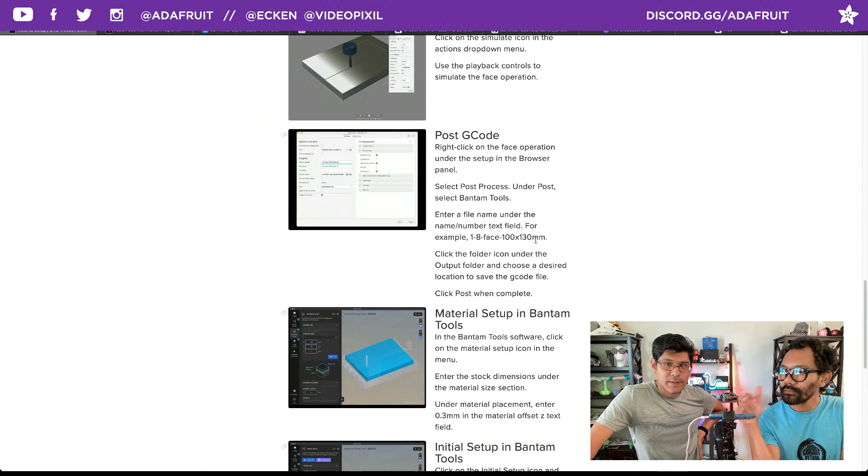And then posting the G-code, I walk through that. I got my own little naming convention where I name the file with the tool first, so 1-8, the operation, it's a face, and then the size of the stock, it's 100 by 130 millimeters. That's how I like to name my files. So we export the G-code, and then we import it into the Bantam Tools software. We set that up and just update our material setup. I walk through all of that stuff there. It's pretty straightforward though.

All right, and then in the next page, we're actually doing the facing of the stock. So, installing the tool, and then actually using the Nitto tape and applying it to the surface of your stock, aligning it to the spoil board, milling the file, removing it, flipping, and repeating, and all that stuff. So check those out. It's pretty specific here.

So after our stock is faced, surfaced to the desired thickness of our bricks, we're going to start off with the bottom of the brick. So I walk through setting up the tool paths for this. Of course, the G-code file is already available if you want to just do that, but I walk you through here, doing all the right settings and stuff.

So we're using a contour operation, a 2D contour. That just lets you do a simple 2D cutout. Our bricks don't have any really 3D bits to it. So it's just going to do a 2D path over and over again until it cuts out one brick. So we walk through that.

And then I'm using a 1/8 inch tool to do the contour just because I feel like you can do it faster. You don't want to use a small tool to do the full cutout because the smaller, thinner tools, they just aren't that long. So you have to kind of consider that.

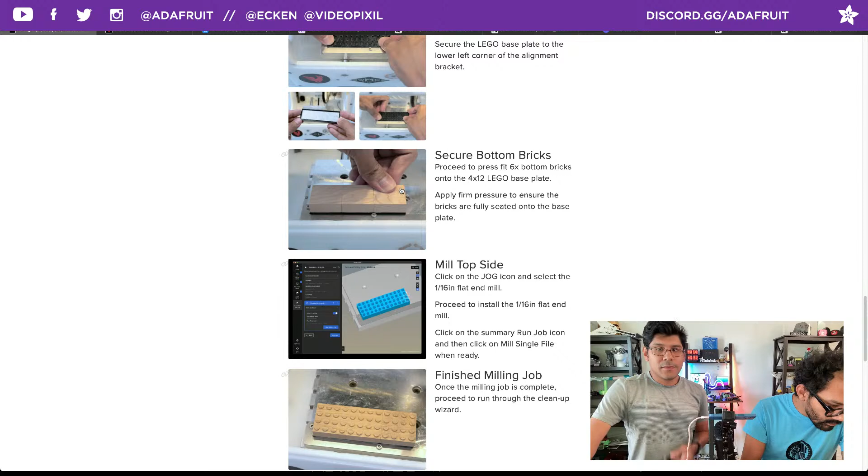And once you have that base plate installed with the alignment bracket, you can just press fit those blank bricks. Those bricks have the bottoms all cut out, so you can see the top there is nice and blank. So once that's all ready to go, we can start milling, and that's what it looks like at the end. For me, there wasn't any cleanup to do on the top side of the brick, which is really nice. And to remove them, you're just going to apply some pressure and pull them off. But they held in place really nicely, especially on the first go.

They have a really nice tight fit, and as you play with the bricks and start building stuff, the tolerances loosen up to the point where they're not as firm, but you want that firmness in the initial milling operation, because you want those bricks to stay in place. Test fitting works out really well. Once you get your first batch, you can start stacking them to see if they all fit in the right orientations, and then you can make a block by doing sets of 3. Since we cut 6 here, you can create a block just to verify that they all fit nicely.

And that's really the whole guide. Lots of fun, really great project for doing double-sided operations for milling. And I'm going to make some more bricks. I'm going to try to do some different sizes, maybe a Duplo as well. That'd be really cool to do, a Duplo brick. Yeah, we have so many spare pieces of wood that we don't want to throw away. We don't know what to do with them. They're too small to really put into a project unless you combine them all. Yeah, I'm going to make a bunch of these and maybe make some bigger ones.

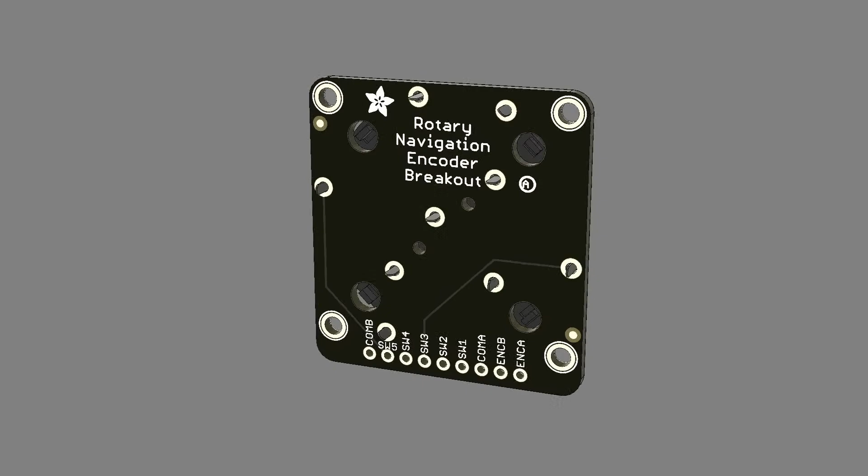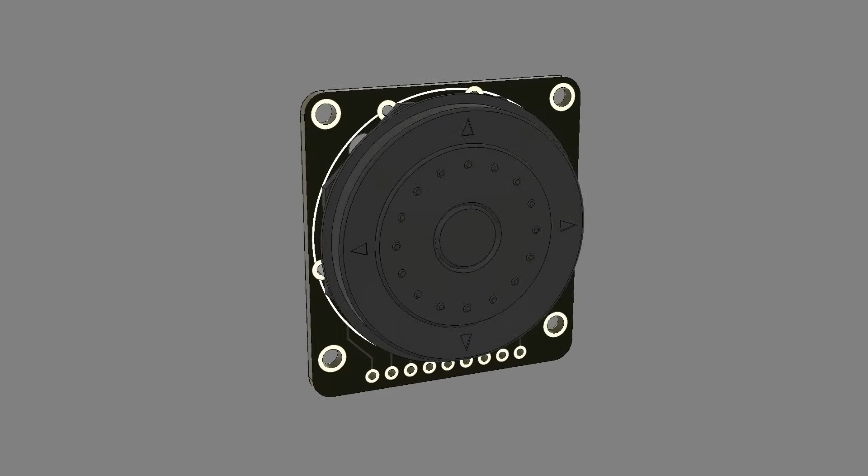Yeah, we also have another shop talk. Hold on, I forgot. Whoop. Definitely check out the CAD repo on GitHub. We have some new parts that I forgot to talk about the last 2 weeks. So this is the ANO rotary navigation encoder breakout. It has the plastic bit, the pins, and the PCB, and the silkscreen. So if you want to make a cool project and embed this into a neat project enclosure, you can use the 3D model to kind of get the mounting holes and stuff.

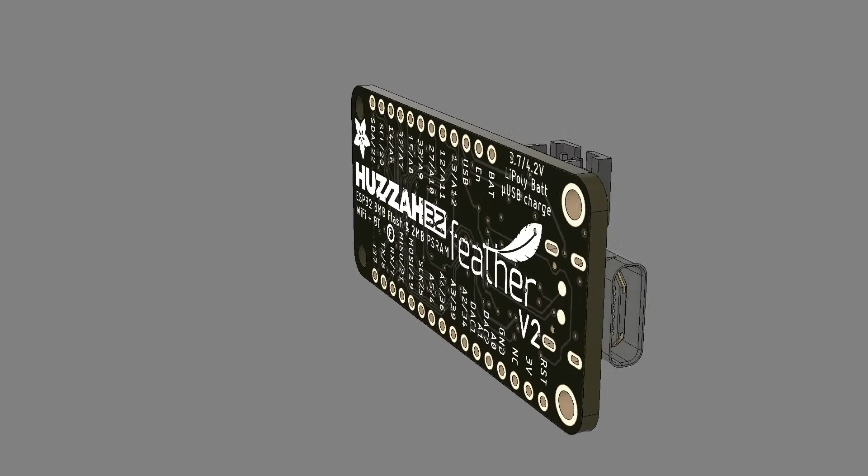But yeah, we also have another one. This is the Feather V2. I'll be working on the S3 and the other new boards throughout the weeks, but I just wanted to share that there are some new parts that you might want.

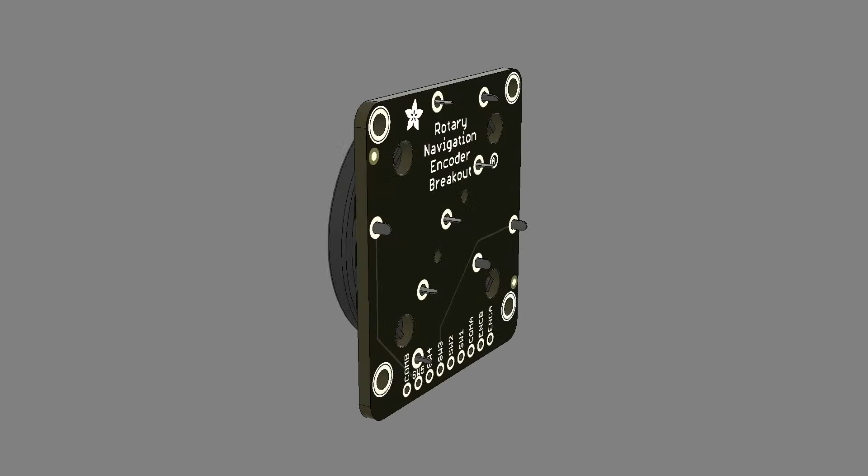And then to see the list of the new stuff, you can click on this over here where it says 180 commits. It's this thing here on the top right. You click on that. It'll give you a full breakdown of the parts that are added and the date. So you can see here, I added a bunch on May 19th. I added all these things here, and all of these were pretty much requests.

So just to let you know, if you add a request, give me a little time and I'll get to it. So things like the 6-DOF IMU and the 1.3-inch TFT bonnet, the RGB matrix bonnet for the Raspberry Pi, a 40mm speaker, the Perma-Proto Gizmo, the nunchuck adapter, the MCP23017 GPIO expander, etc.

So under the Issues tab, you can see here the parts requests. And it looks like we got some new ones here. The DIY USB HDMI parts. So I'll have to get those together. Cool. Yeah, that's a fun one. So that is this week's Shop Talk. Some new LEDs and some new CAD files.

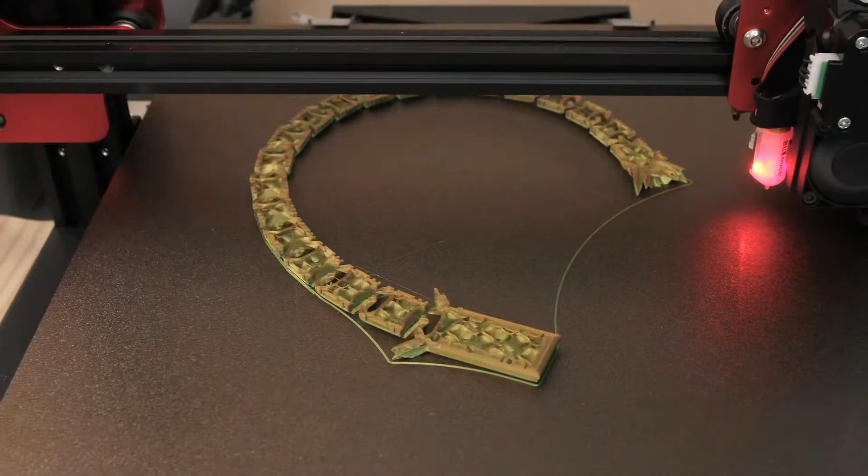And now we can take a look at Community Makes. All right, we got a couple of them. Last week's Community Makes was this super cool articulating Quetzalcoatl. This is the feathered serpent from the Mesoamerican culture. It's a bit of a snake with feathers. Sometimes they have wings. Super cool articulated design.

It's print in place, and we used some rainbow PLA filament. And the scales and the details, little kind of swirls, look really cool. Beautiful. Yeah. Pedro used some fishing string here to kind of demo it in the video. A lot of fun. It printed out really good. It's kind of ready to go when you print it, right? Like you didn't need any finishing or anything.

No, that's it. And here it is on camera, the silky rainbow, like the way that they do the changing on the filament spool, was perfect for this. So you have a little belly, you have most of the rainbow colors on his feathers there and on his tail. So it looks like it was kind of planned with the green being on the top of the scales. Yeah. I didn't plan any of that. It just was perfect in terms of what color was coming up next.

This is a free model. They're using the little chain-like geometry to have all of these linked together. And there's a couple of different sizes too, so you can print a smaller one or a bigger one, and different orientations as well. And the detail on this is fantastic. Yeah, check out all of the little scales they were able to get in there. Yeah, I like the kind of square swirls. Very Mesoamerican.

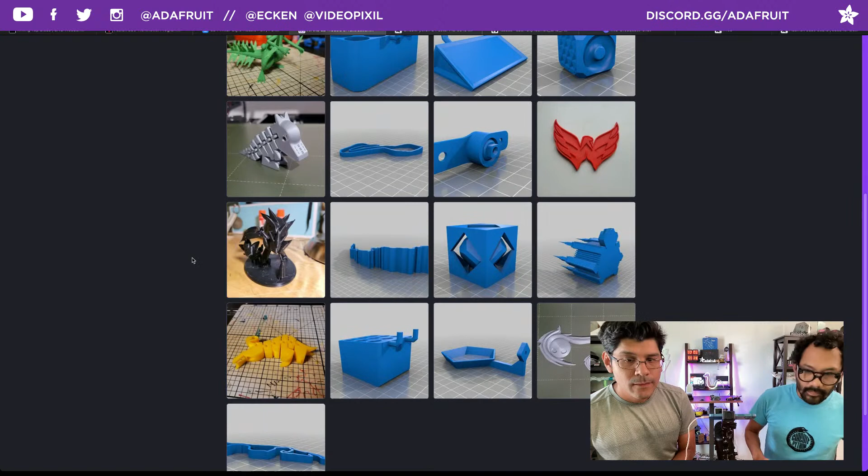Good stuff. Super cool. And yeah, check out Rextruction on Cults3D and check out some other designs. Okay, that was last week's. Super cool. Like you were saying, you could put the string on there, do a little puppeteering. I actually wanted to put little acrylic sticks on there to do his little head turn, but ran out of time. Sure.

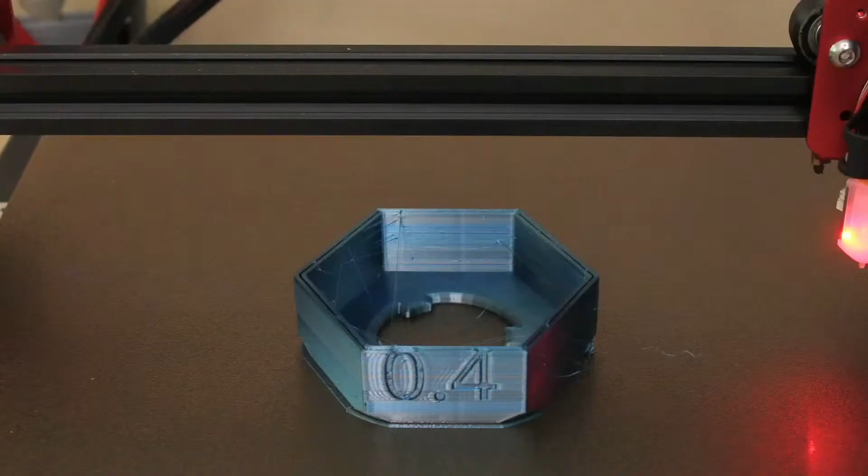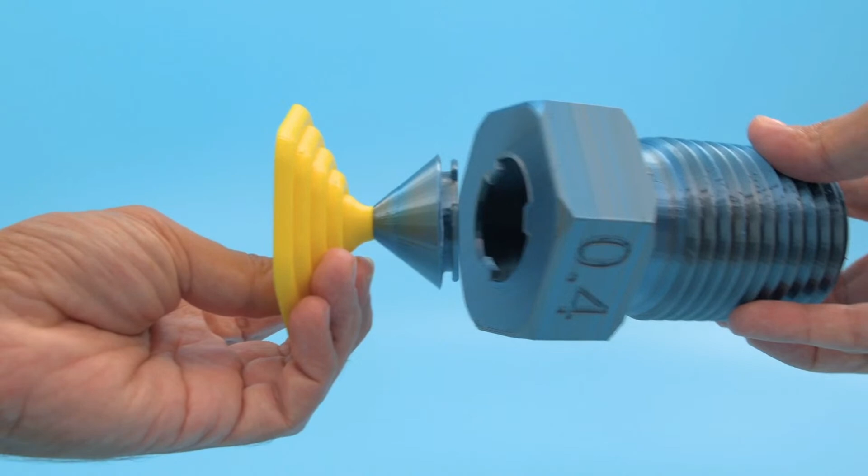And then from this week, I see a bunch of these nozzle models always getting posted, but I really like this one because it doubles as an actual pen tool holder with a secret compartment underneath. You can see where the nozzle gets attached, and then we're using this little base plate with some screws and a nut to keep it up. I like the way that illusion maintains, because at first I was like, how is that tiny little thing gonna hold something with substantial weight on top as a holder?

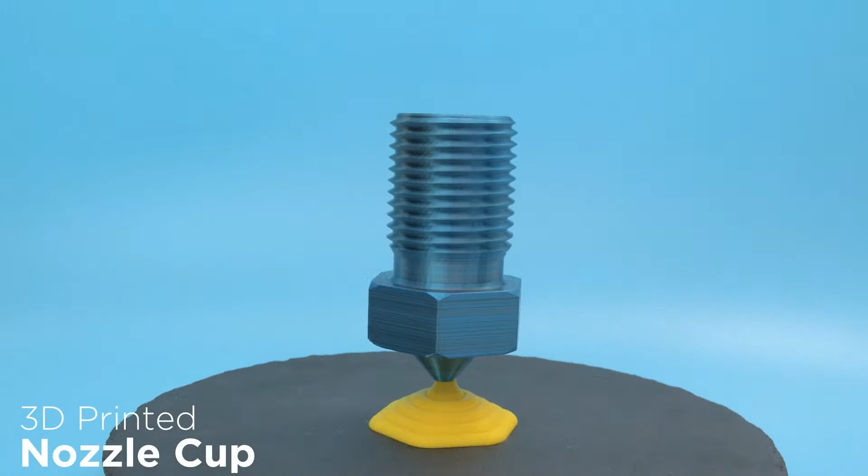And that's how. I think it was an M8 screw with an M8 nut, and that does a really good job holding it in place. I really like that it's a thing you see all the time, your nozzle for printing, turned into an actual holder. It could be a nozzle holder. Sure. A little storage for that. And here it is on the overhead. We're using this really nice gradient blue to silver.

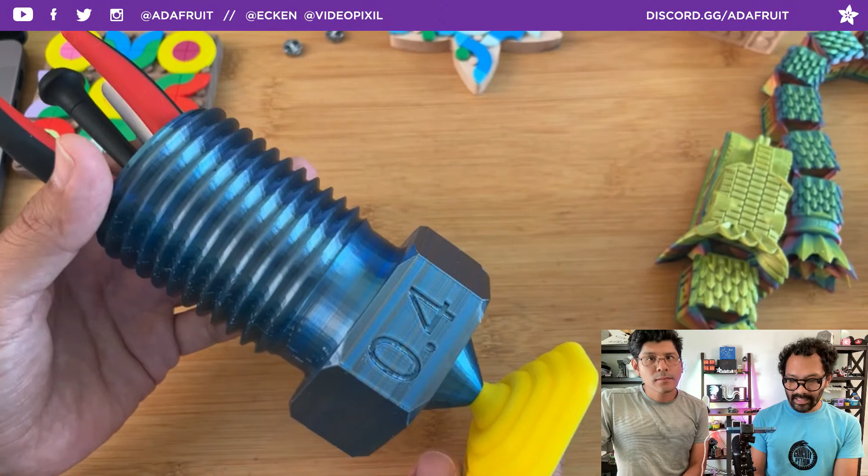Did have some sort of twisting action going on here, so you do have some banding, striations, from the color, but it's not too bad. Yeah, it looks good for the price, for this sort of stuff. I'll take that out there, and you can see where the screw goes in there with the nut. And I don't know if I'll be able to. Yep. Let's see. I'm gonna take this out here.

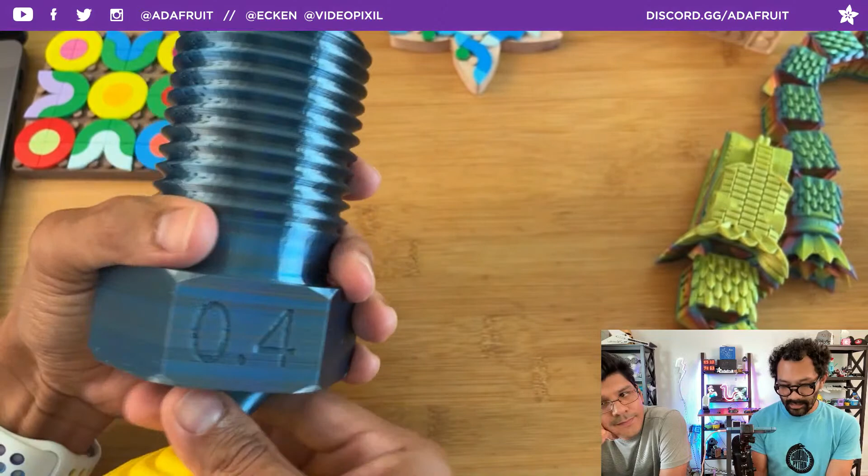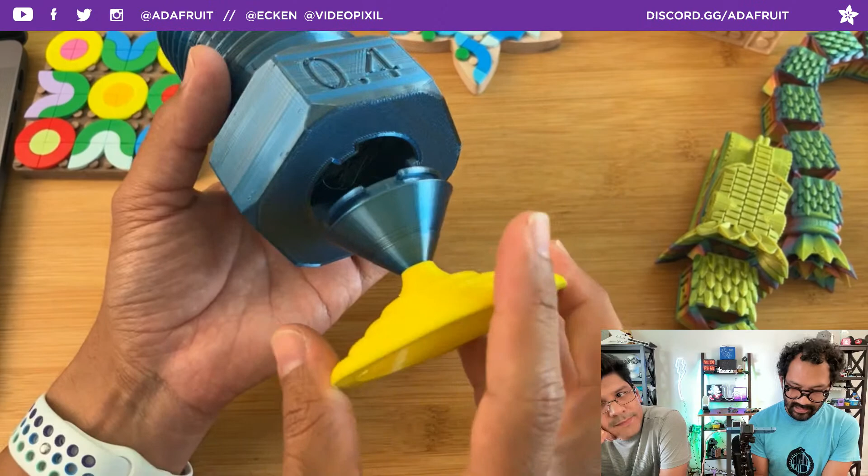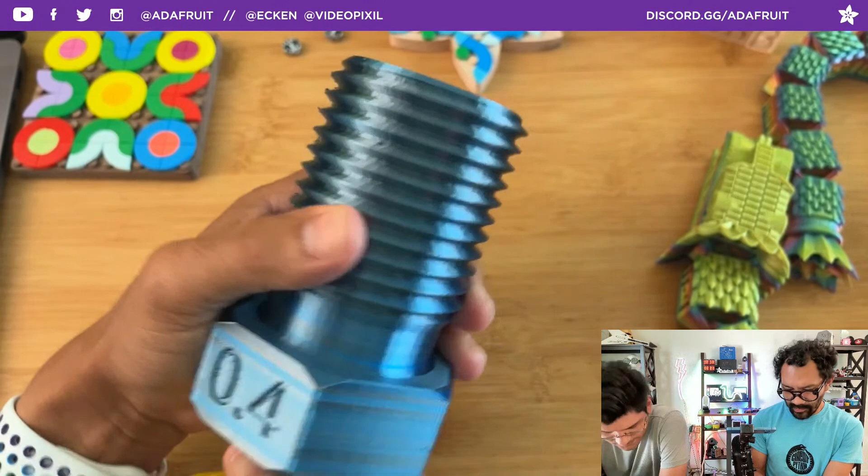You have a nice little hidden compartment on the inside. So you can have some hidden treats, something chocolate on your desk. Some gummies. Yeah, like that. And you have ample amount of space in them. Scalable as well, I assume? You should be able to scale it, yeah. Cool. No scaling on this one. It seems to be big enough to hold a nice assortment of tools that you use for printing. Or just stationery, pens and stuff.

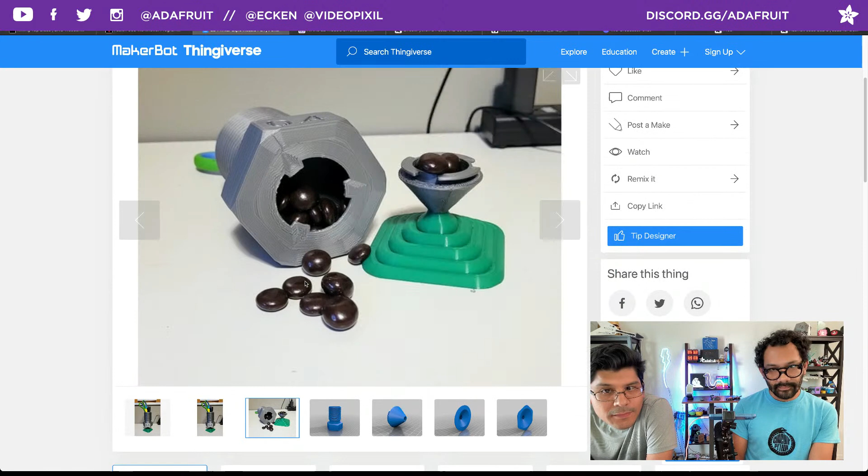Fantastic name. International Man of Mystery on Thingiverse posted this up. And here's some photos of their build. They put these little cocoa beans or something. Chocolate beans. Probably espresso beans or something. Right. And really nice touch. It's a remix of Jen's Nozzle Bank. I like Thingiverse for that. You could always get a

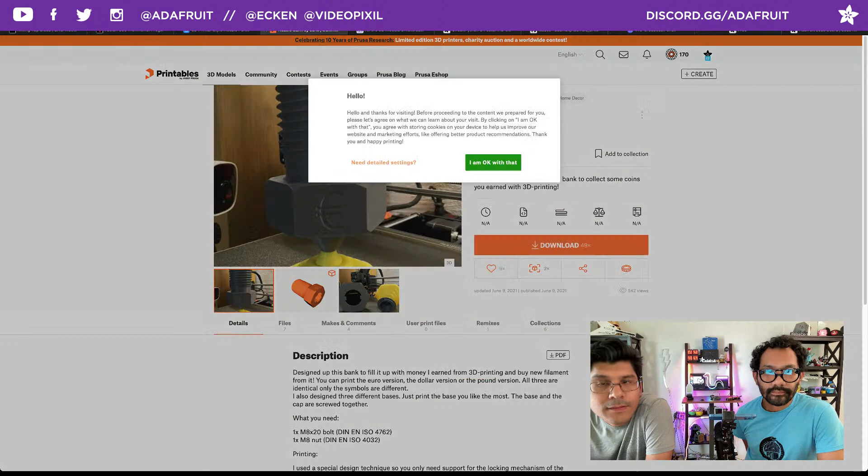attribution. Looks like it was on Printables. So here's the source. So what did they change? I guess they added the hidden cavity. Yeah. Okay. Yeah, the M8 bolt. M8 nut. Cool. But good to give attributions to Jen. So Jen did the original here.

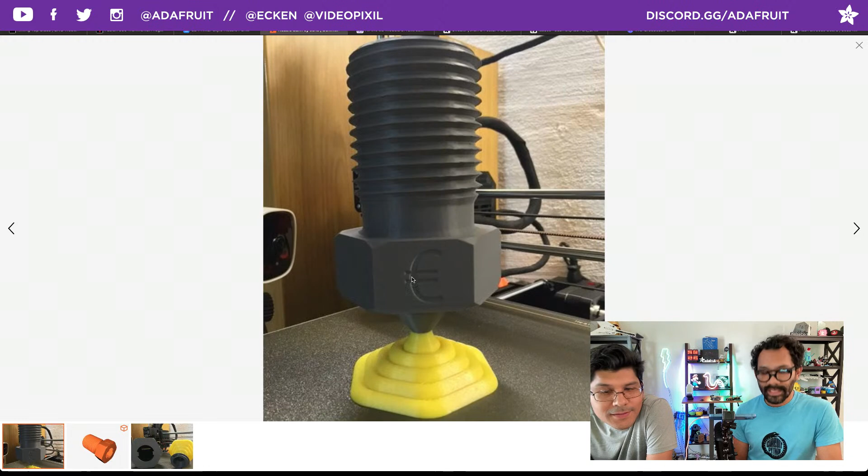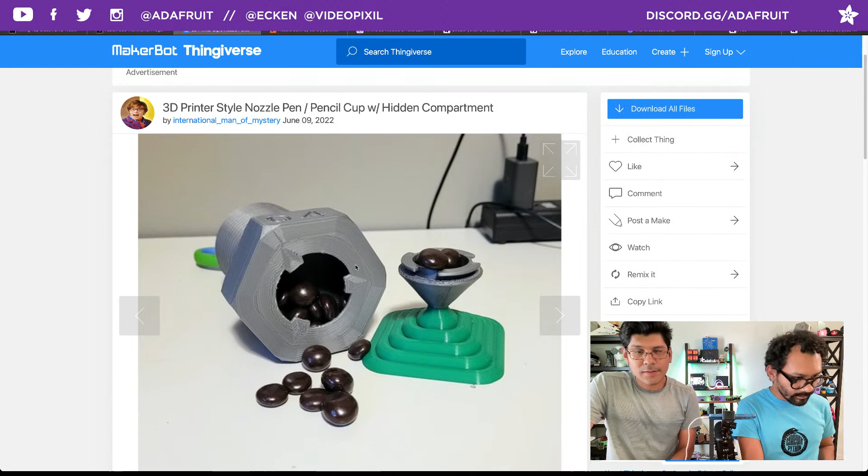And then the really nice touch is that there are multiple different bases. You can have a hexagonal base, a square, or a circle base. It's the filament that is being extruded. Cool. There's different bases for both models. Cool. Very nice. Alrighty, so there you go. That is this week's time lapses.

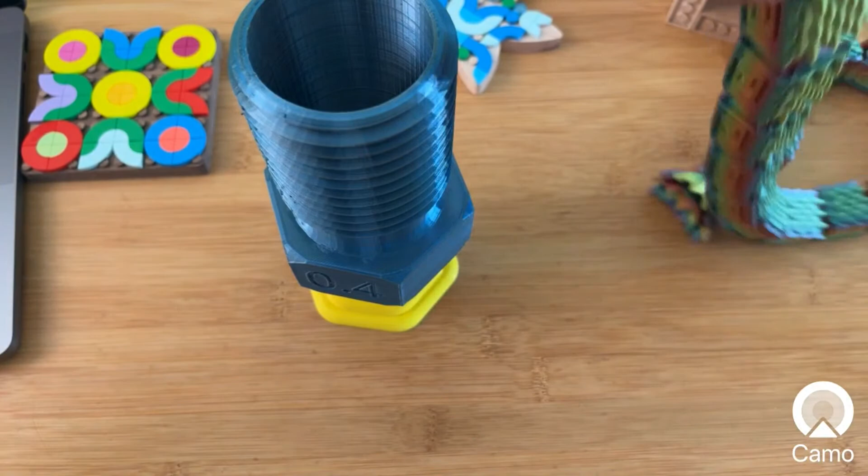Timelapses. I think there's a couple of models for this week. Now, can we put the snake inside the nozzle? There's a snake in my nozzle. Does it fit? And maybe the smaller version, because this is the bigger one. Cool. Well, then you can wrap it around. Haha. Chokehold on the nozzle. That nozzle there. Rawr. Cool.

Okay, let's see. What else were we going to cover? Oh yeah, some community makes this week, right? Let me get some links together. I think we have a few that were sent to us. So first up, we have a make of the Perma Proto snap fit case. So if you have a Perma Proto project and you're looking for an enclosure that has vents and some mounting holes and snaps together, you can use this.

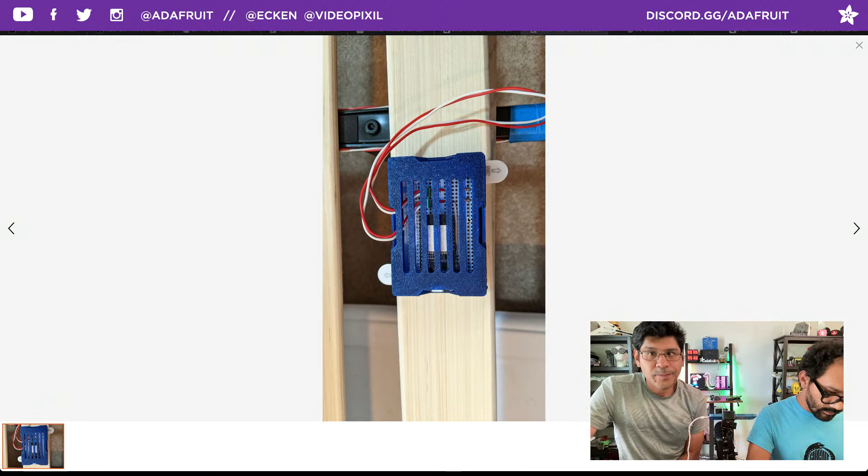And I'm going to look for makes in the comments. This was posted up by Prusa user MCXX, and they say it works great. I just clicked on it here, and it looks like they have it secured to a piece of wood. It looks really good. And you have lots of holes to get wires out. So it looks like it's an ESP type module, some other cool things. So that's really nice to see. All right, next up.

See what I can find here. Next one is the Nefertiti bust, and it looks like they did a hollow version of it. I think something got overwritten. Oh. Yeah, somehow this changed. Can you undo something? All I did was select to copy this over. Yeah, I didn't do anything. I don't know why it's there twice. But let's take a look at Nefertiti then, shall we?

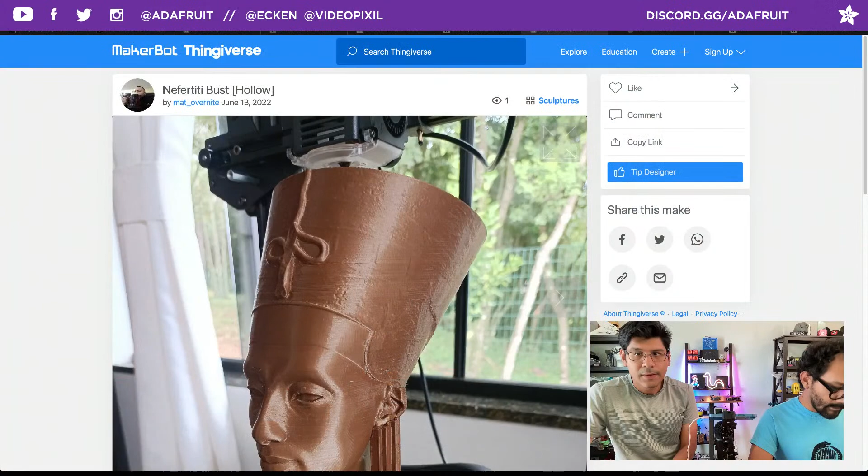So Nefertiti bust, all we really did was take the high resolution model from a few years ago, reduce the polygon count and make it hollow so that folks can make it into a planter, but it looks really good in this kind of brown material. And let's see if there's any comments that I can read. Awesome, thanks. The printer was a BQ B1. Some supports and 0.2 resolution. Looks good. Could also double as a tool holder.

Nefertiti tool holder. Cool. You looking for anything in particular? I'm looking for the makes. Yeah, makes don't show up like that, unfortunately. They show up in the dashboard and then they get lost. So it's kind of hard to keep track of these things. But I think that was it.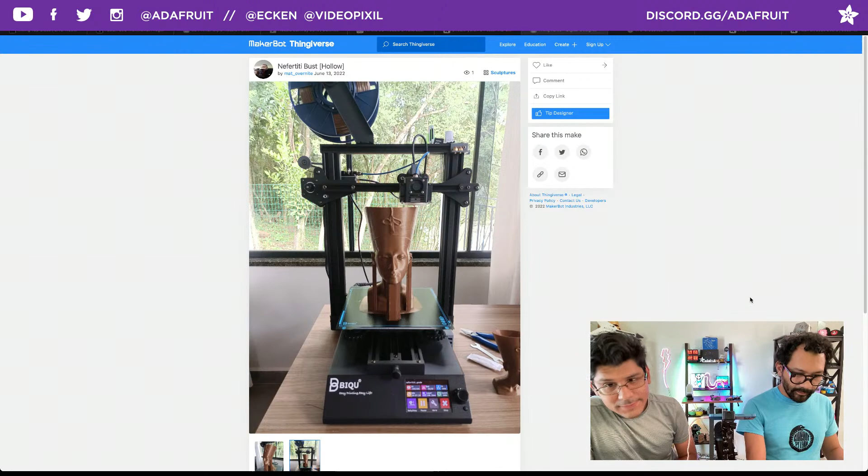Looks like chocolate. It's good. Good observation, Andy Calloway. Looks like chocolate. I want chocolate. Yes, I want Lego chocolate. Does anybody want Lego chocolate? Certainly Bruce is saying stop eating my support material, I guess, for the chocolate printers. I think that is what you do with the support material. It's like licking the spoon when you're making cake. Yeah. Cool. Thank you, Bruce.